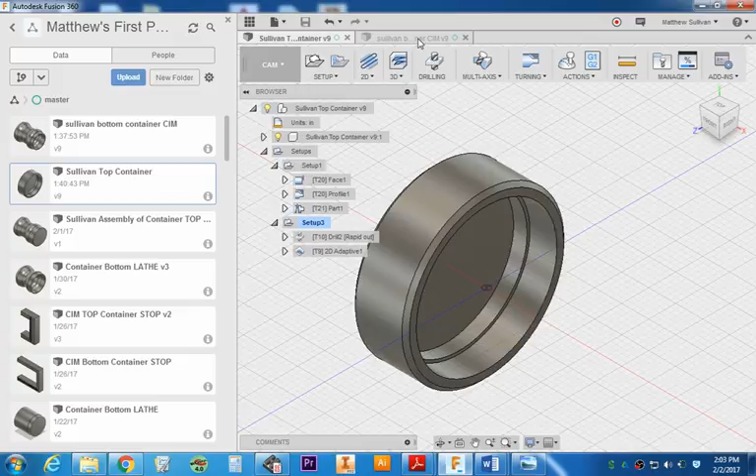As I stated, we're going to do the exporting of the G&M code for the bottom container. We're going to double check that everything is working well.

First thing I'm going to do is change this setting over to visual style shaded with visible edges. What I'm going to do next is double check that everything's set up correctly.

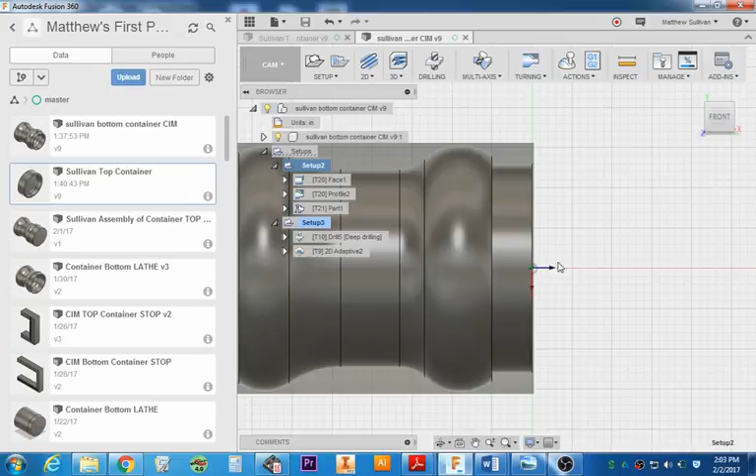So I'm going to flip it over to the front view, same thing I did before, zoom in, X is down, Z is out, right at the front and center of my part. Double check it's in the front center. It is, it looks good.

Right here, X is right left, Y is up down, Z is facing me. If I flip it over here, you can see we're definitely in the dead center of my origin. Z is up and down, just like it always is.

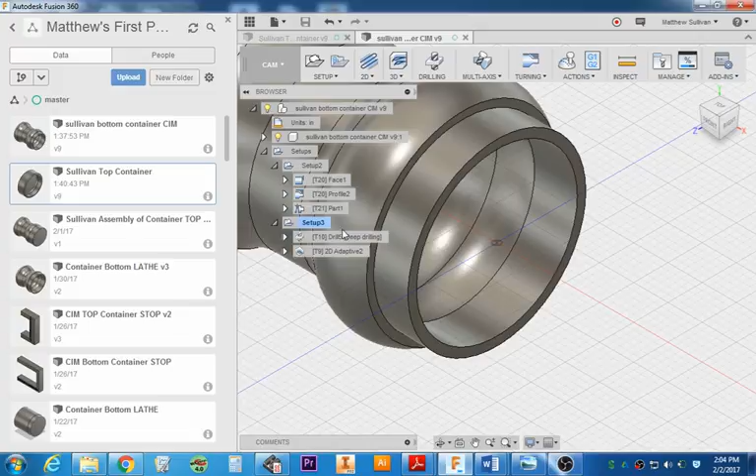X is left, right, Y is the vertical motion. I'm going to flip it over here to the front just to double check that I am at the top of the part, which it is, top center of the part for the milling. Lathe looks good too. So now you need to highlight one of these features.

We are going to do the setup. This should be your setup 1, but if you made a mistake and deleted it, it will be setup 2 or 3. You're going to highlight this first. You have to highlight setup 2.

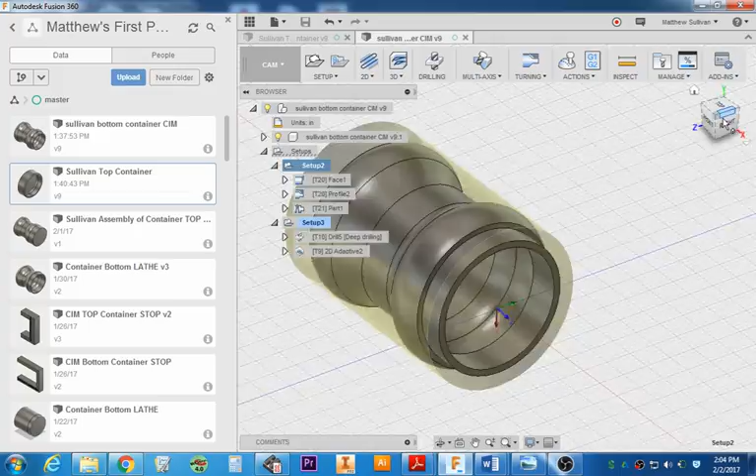Also notice that it's round. If I click over to the right side, it is circular just like my part. That's good. Setup 3 is rectangular because that was a milling operation, drilling and milling. So again, we have a round feature, round part.

We're good. We're going to go to G1. This time, yep, we're going to keep it, because we're doing this all at the same time, we're pretty good. Like I said before, we're going to change this to 10, whatever. If you're 10,040 or 11,040, whatever your number is, please add that in with a 40 at the end of it.

We're going to also make sure we're in the H drive. It says right there, but just double check. We're going to make sure we're exporting to the H drive, PLTW CIM, container folder. Okay, that looks good. And we're going to call it Sullivan's bottom container, but we need to put lathe.

This is really critical because we don't want to get mixed up with lathe and mill. The rest of these settings should be good. Make sure the maximum spindle speed is at 2,000. I don't think it's going to affect the part because the machine can spin no faster than 2,000 RPM.

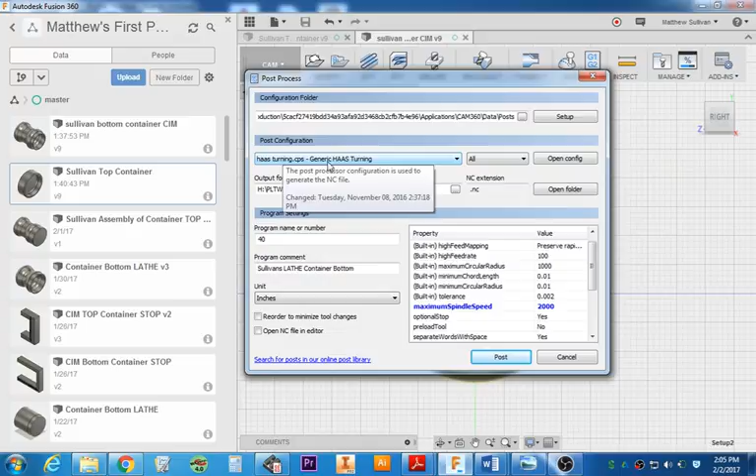Again, lastly, generic Haas turning. It has to be Haas turning. So after you double check all those things, go ahead and post process, and make sure I grab the right spelling here.

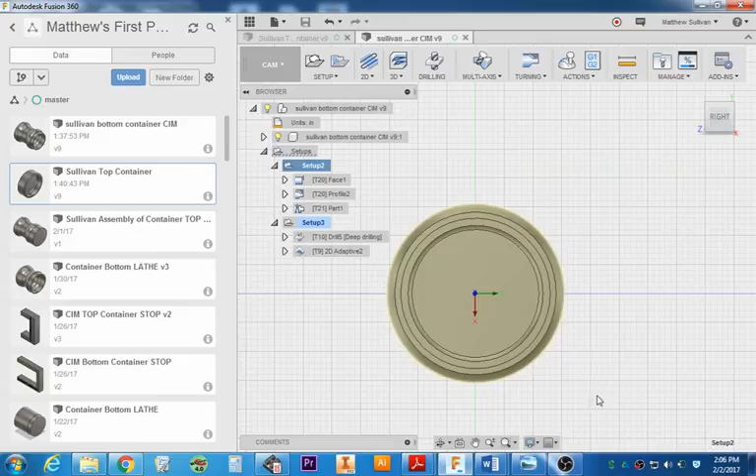Instead of the top, we're going to do the bottom. Make sure it says lathe and your name, so it'll be easy to find on the flash drives. And we're going to export that and post-process it.

So now we processed it. We're going to go to this, go open. And we have the bottom container right here, the newest timestamp. We're going to open again.

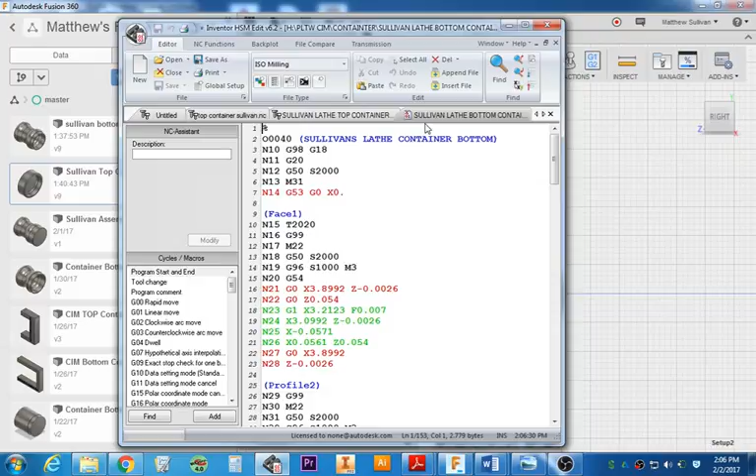And we are going to have to edit those G54s again. Highlight and delete that. Find G54, find the next one. This entire line will get deleted. You can do find and replace and delete it, omit it that way.

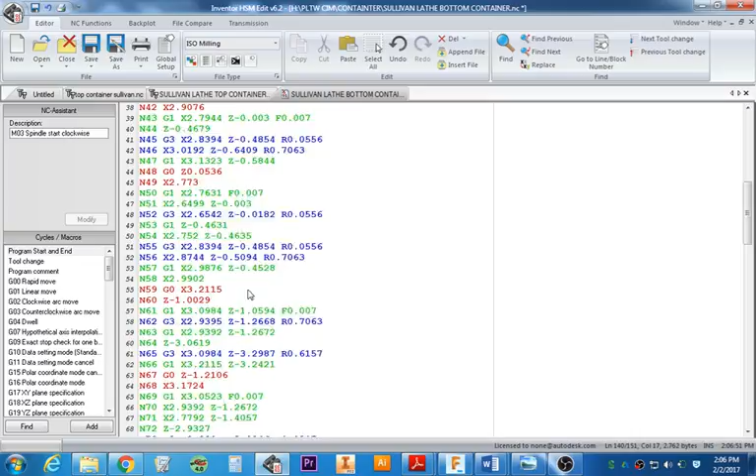But this is just the way I like to do it. And that looks pretty good. We're going to go back, we're going to hit save. And now I'm also going to make sure this is in turning, ISO turning.

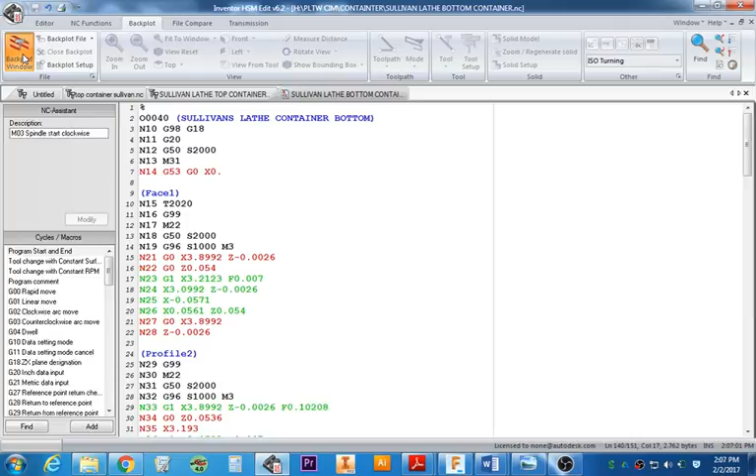Backplot window, and this is exactly what I want to see. I want to see the curved lines. I want to see the facing operation down the front side of this. This looks excellent. I'm real happy with it.

It's going to turn out great. I already tell it's going to turn out great, and I don't have to worry about a single thing. There's no crazy tool paths in here. Everything looks like it's going to be nice and smooth, the nice flowing lines back here.

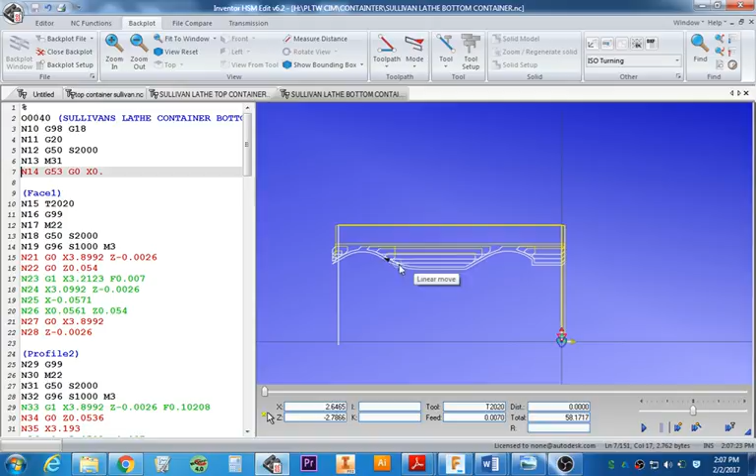And this is awesome. So what I'm going to do now is do a file save again. Well, I can't do a save again because I'm all saved up. So it says Sullivan's lathe container bottom right there. So I'm really happy with this.

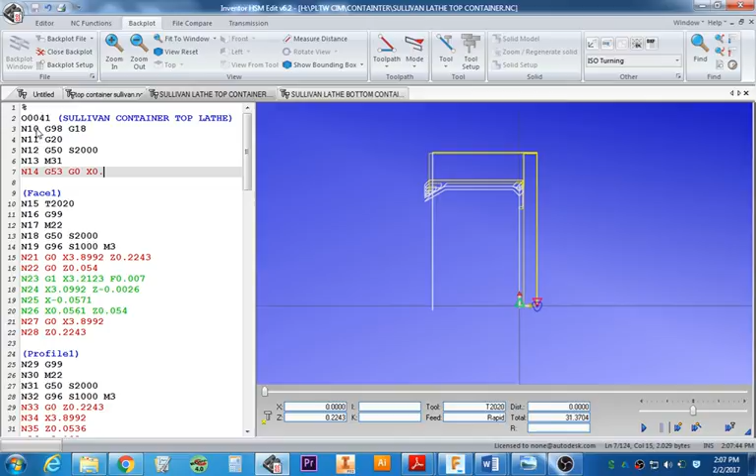Anyways, Sullivan container top lathe right there, the bottom is right here. These should fit together really well. Thank you for watching, and good luck exporting for the milling operations next.